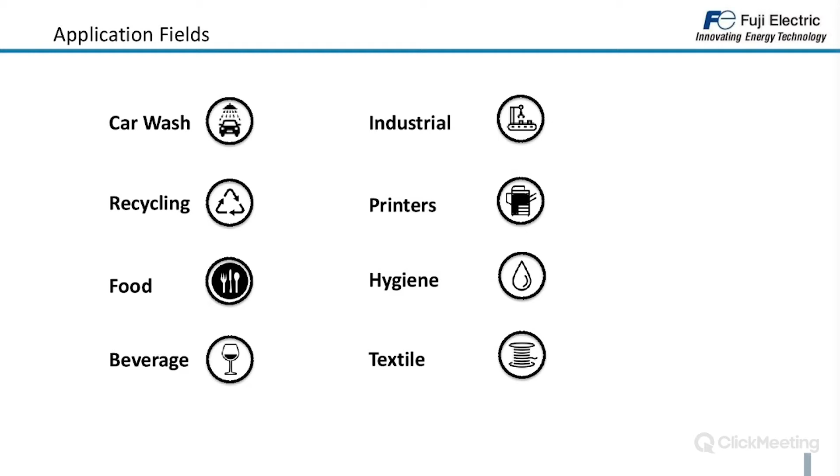So in the United Kingdom, the first one is a petrol station jet washing machine. The inverters used on this are the FRENIC Mini 2.2 kilowatt. We also use the Technoshot HMI on this. The reason they selected the Technoshot HMI is because it's extremely bright.

As you can see, this particular machine is situated outside. We're working with a PLC manufacturer that couldn't actually supply the inverter drives, nor did it have a 7-inch widescreen display. So whilst working with this company, the inverter itself is running a high pressure pump at different levels for different cycles, and the HMI displays the wash cycles and the time.

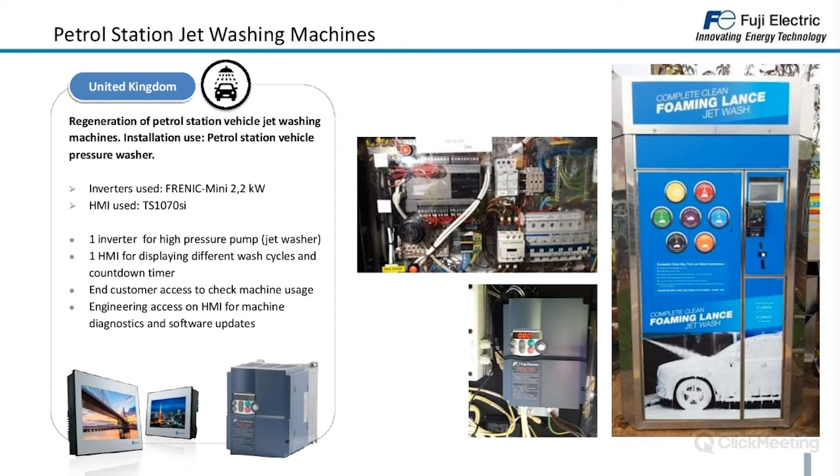It's got a countdown timer to show the user of the machine what cycle it's in. For the end customer, the petrol station customer, the information they could get from the HMI includes filling up the tanks or solution, or doing some general maintenance on the machine. For the actual manufacturer of the machine, there's the ability to access the engineering screens to diagnose and effectively and efficiently mend the machine and put it back into service.

So we're moving to Belgium in the hygiene market, and this is an industrial washing machine. This particular customer has been using Fuji for over 10 years now, using the FRENIC Mega. This application required control of a special motor with power between 7.5 and 45 kilowatts. The frequency needed to run between 1.2 hertz and 150 hertz, but the optimal speed was around 30 hertz.

As you can imagine, you'd need high torque because you've got water and product clothing material inside the washing machine, so it's necessary to have high torque at low speed. With the spin cycle bringing it down from high speed to zero, you'd need braking capabilities. With the FRENIC Mega, you've got outstanding braking capabilities with an integrated braking unit built in, up to 45 kilowatts.

As I mentioned, you need high control of the torque. We achieved this without the encoder, using vector control. And because the application is running in a laundry, the carrier frequency was important, so we needed to increase the carrier frequency to reduce the motor noise. I have to say the technical help from Fuji to get this machine up and running and set all the parameters, we did.

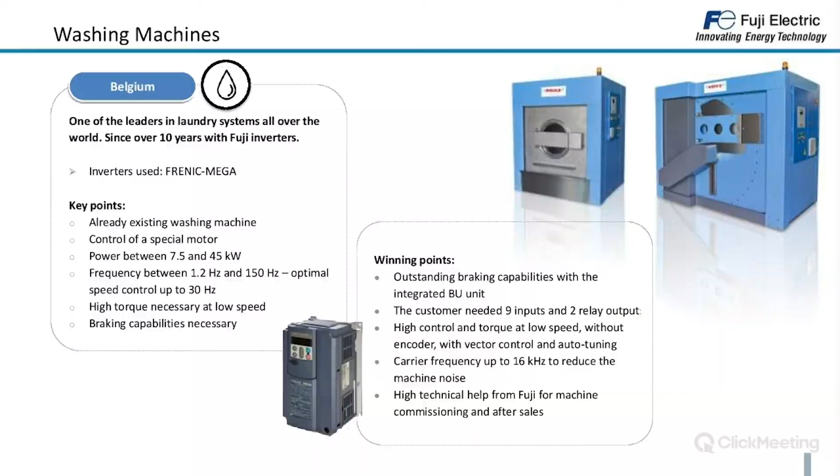So Spain, still in the hygiene industry. This one's a duct cleaning machine. Basically, if you can see, there's a brush on the end. It's like a hose with a wire inside, and the flexible hose is used so that it doesn't cause any damage to the ducting.

The inverter used is a FRENIC Mini C2, and we're using the MONITOUCH Technoshot screen on there. It's fair to point out that this particular customer wanted to differentiate themselves from the competition, bearing in mind that this machine is a global machine, shipped around the world. So they introduced an HMI to the machine and removed all the standard push buttons, etc., from it.

The drive used is, as I said, the FRENIC C2. The reason they used it is because of the quick response torque limiting time, to protect the wire inside the hose and also to protect the ducting. There are talks of a future possible upgrade of the screen because, as I mentioned, it's a global product, and with the V9, you're able to gain remote access to the screen.

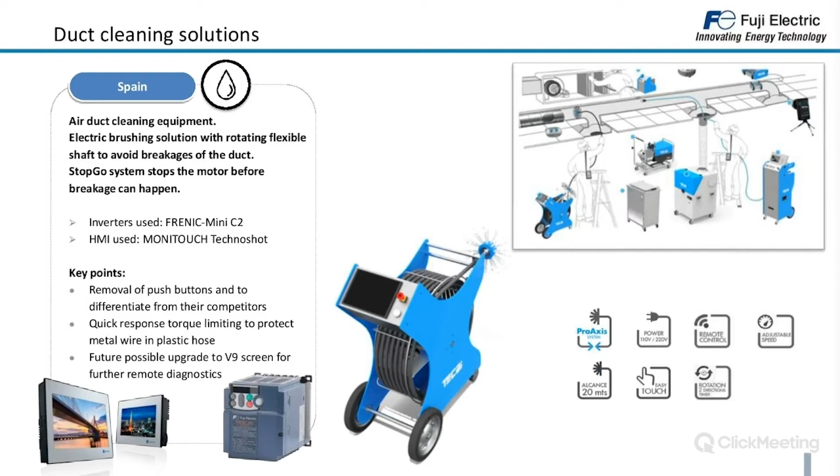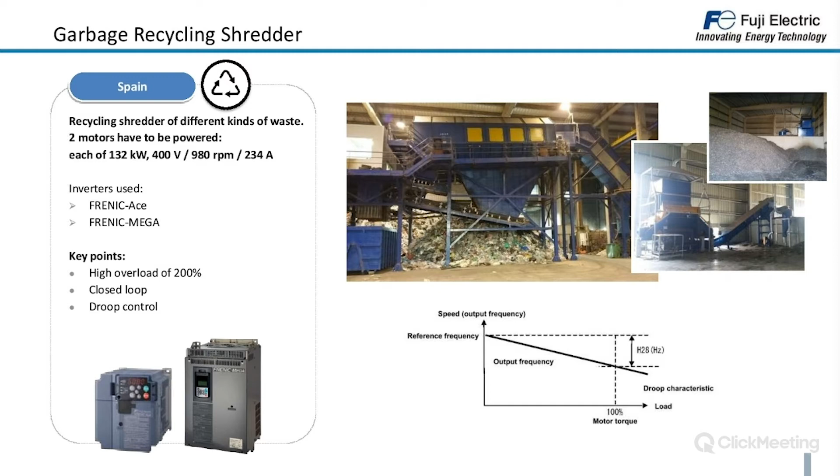So Spain again, this is in the recycling industry. This is a garbage recycling shredder. Basically, this shredder has two motors of 132 kilowatt, and this is using a Mega. The ACE is basically on the conveyor, and the key points here are that we needed high overload of 200%, and with the Mega we can achieve that for 3 seconds. Also closed loop control because we need to keep the speed constant, and droop control so that we can actually load share.

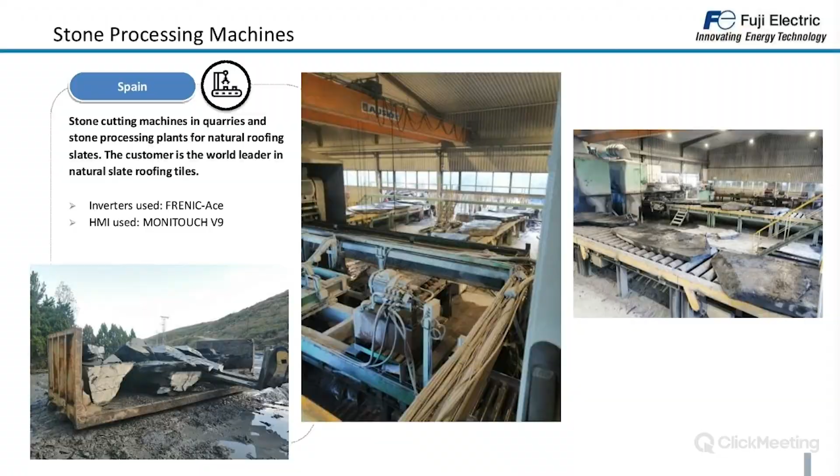Spain again. This is a stone processing machine, but essentially this stone processing machine is an end user. They have some remote machines in the quarry, but essentially they wanted to upgrade the plant, and they've used the FRENIC Ace and the MONITOUCH V9.

One of the reasons, through negotiations and discussions, this was done with one of our partners in conjunction with Fuji. What was important to the customer was the after sales support and maintenance, so we were chosen with the partner based upon the sales and support for this plant. Also, with our inverters, we have a 10-year life cycle. In the plant, we use 256 FRENIC inverters up to 132 kilowatts, and there are 60 V9 HMIs there too.

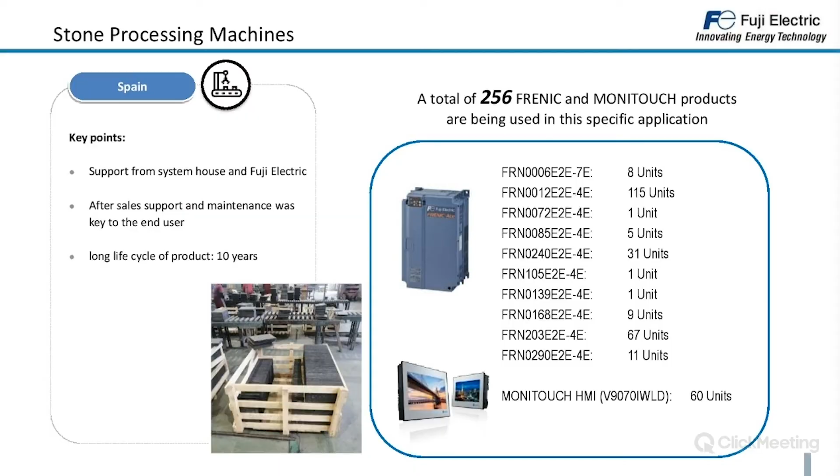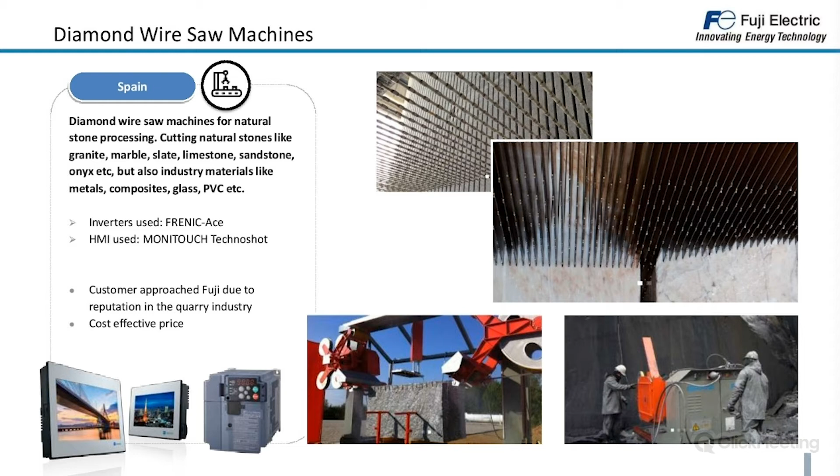Because of the success that we have in the quarry industry, we're still in Spain. This is a diamond wire saw machine, and this particular customer actually approached us during the lockdown of this year in March, and we gave them support over the phone and got them up and running on the HMI. They're now using our HMIs, and we are currently working with them to start using the ACE inverters.

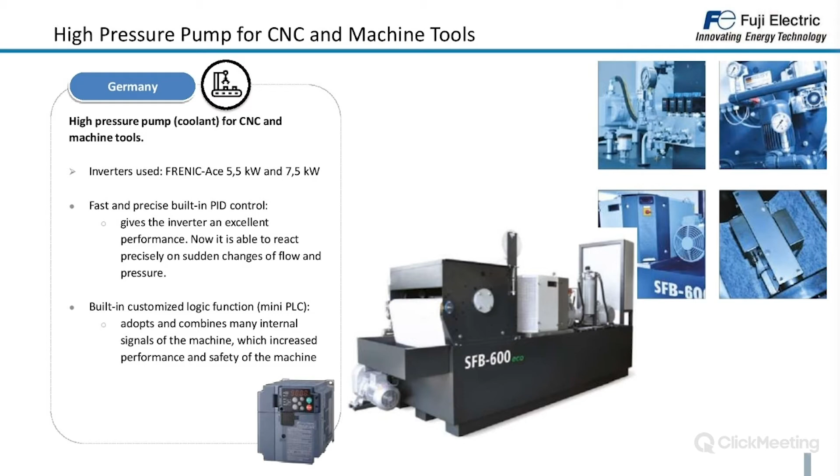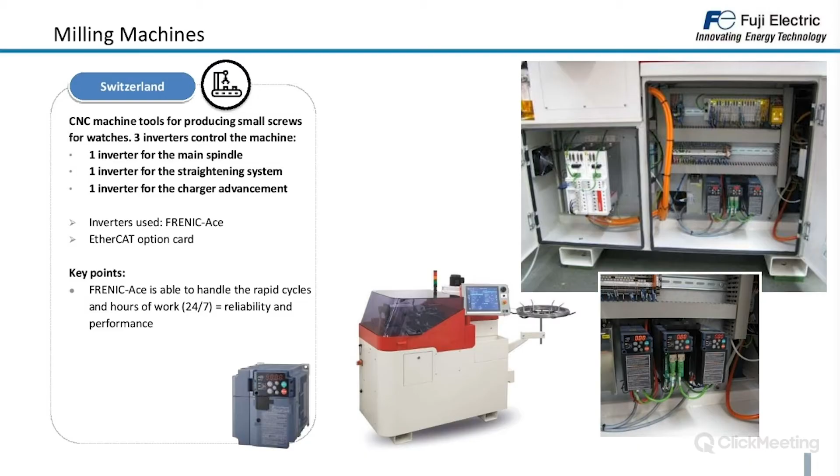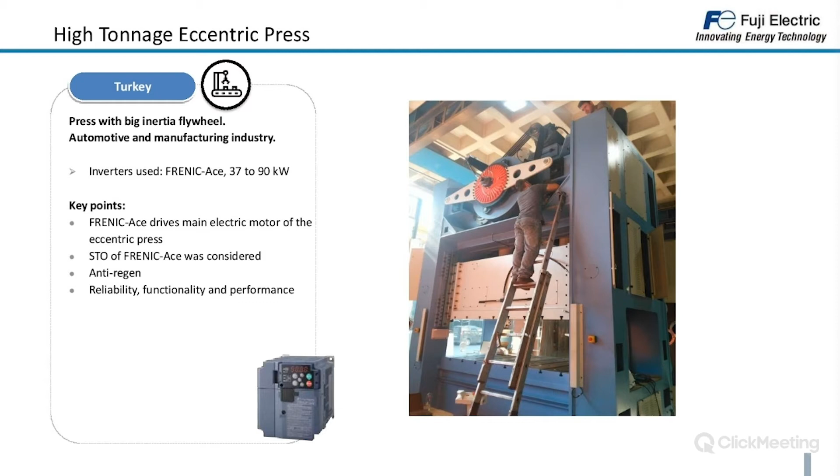Moving to Turkey, this one is a high tonnage eccentric press. The drives used here are 37 to 90 kilowatt drives. The key points for using this inverter: because of the shock loading when using a press, we've got something called anti-regen, and essentially that stops us from overvolting on the drive and tripping the inverter. We've got safe torque off on the drive as well, so that was considered for this particular application, and of course reliability, functionality, and performance.

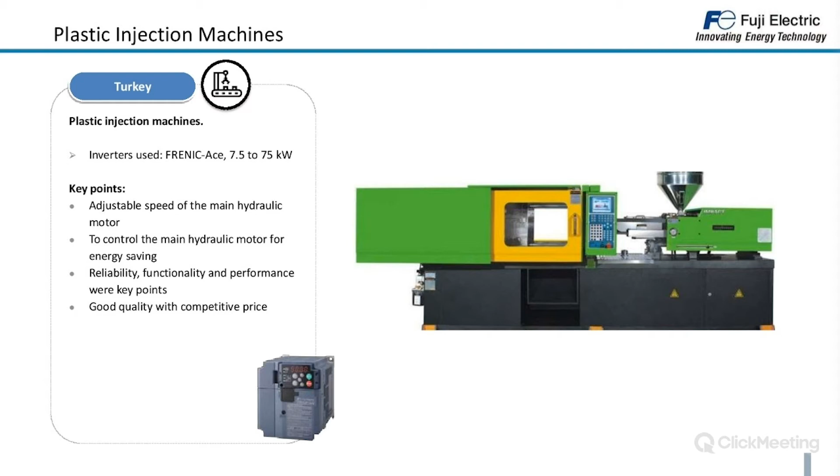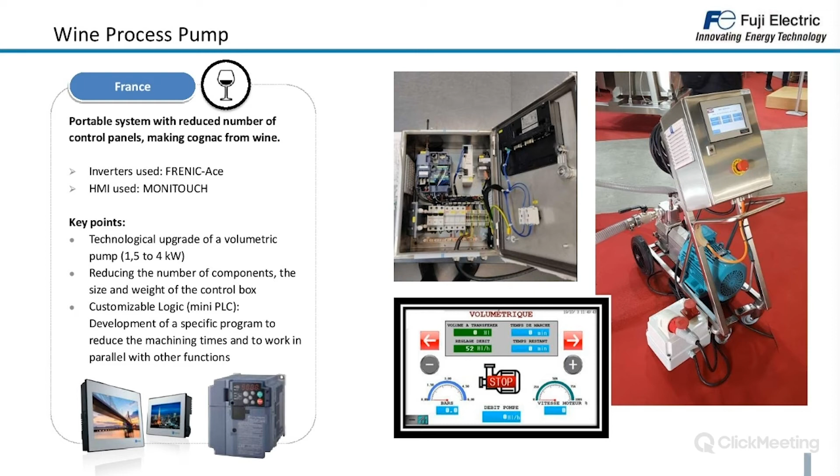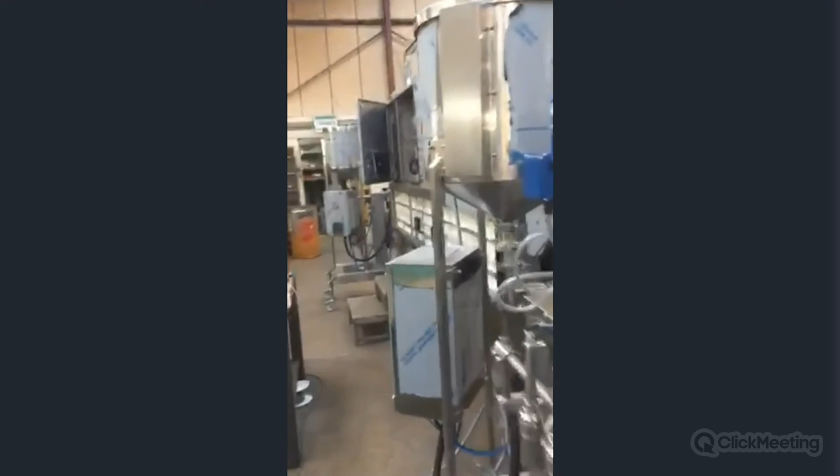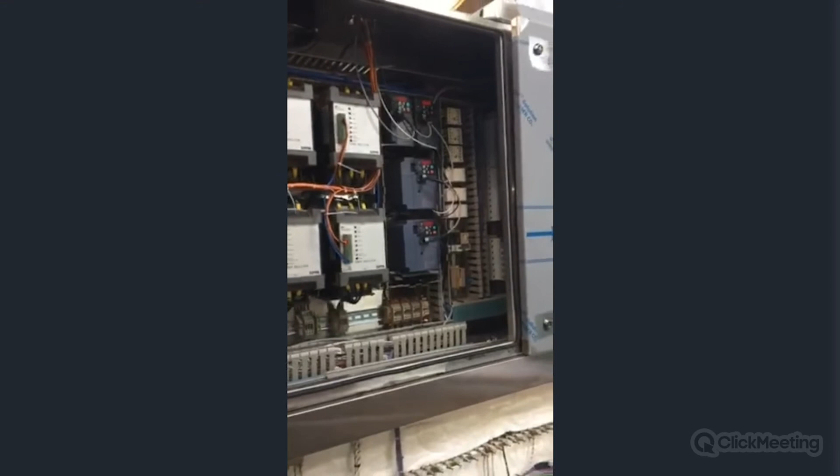As you can see here, this is the fans for the ovens using FRENIC Ace, and then there's the servo controller, which is flipping the omelettes over, and then another oven process here with some more drives, and then the HMI. The whole network actually was running on Modbus only.

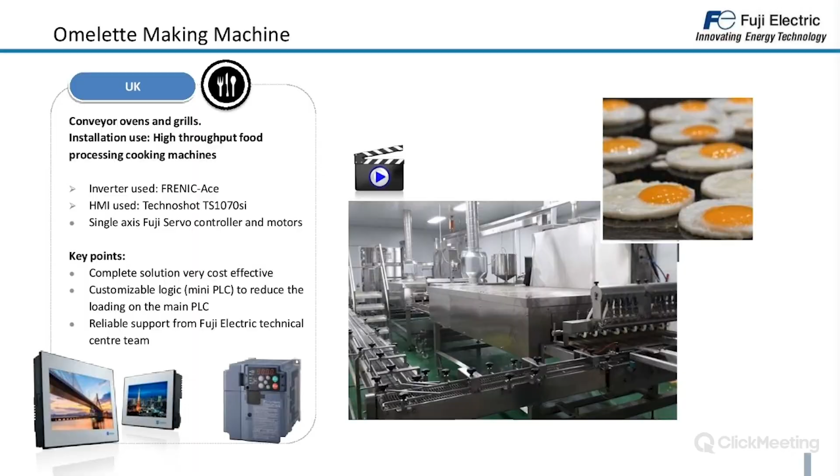Moving to Italy, bread making machines. This is a company called Minipan, and Minipan manufacture industrial scale machines, but also modular machines for the dough, for the molding, etc., before everything goes into the oven.

The inverters used, as you can see, the FRENIC Ace on an EtherCAT network, and also Modbus communication. Each modular machine uses 2, 4, or 6 inverters, while the industrial lines use 24 to 60 inverters. They used FRENIC inverters because of the reliable product, the superior technical performance, and the technical support given to them pre and post sales.

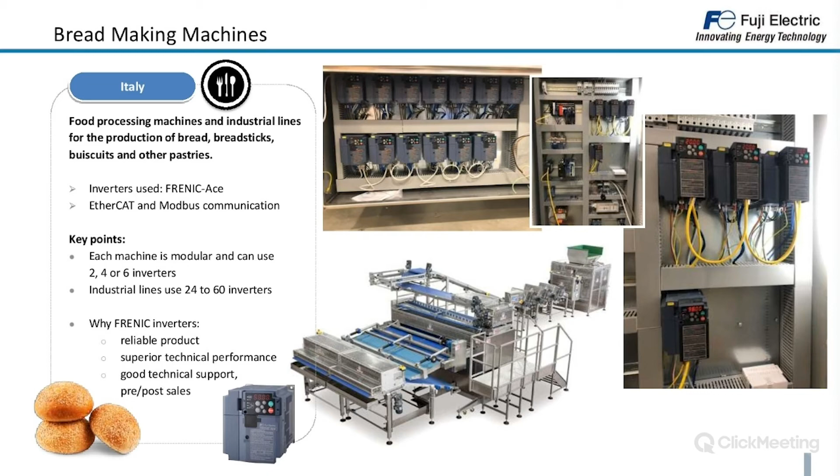Over to Croatia, a candy production plant using 16 conveyors with an HMI. They used the Mini C2 inverter on this one, and a Technoshot 7-inch screen. What they wanted was global control and the ability to switch on different conveying systems on the plant at any one time.

They also used the HMI to do all the data logging. They wanted to monitor the power and performance of each conveyor, and to determine any failure by using predictive maintenance.

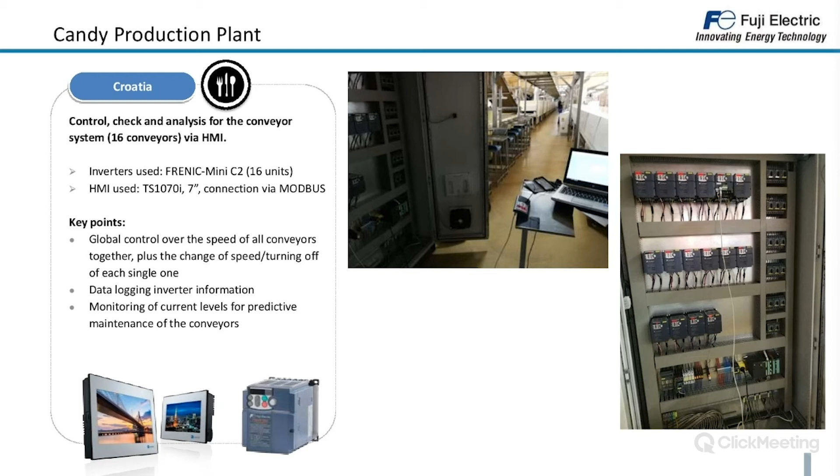This one's interesting - a restaurant in Croatia using the FRENIC Ace and also an HMI. What it's doing is actually rotating the restaurant whilst you're eating, so you get a 360-degree view of the city it's located in.

The reason for doing this was because prior to using inverters, they had failures on the motors. Essentially what they wanted was to be able to control the motors more effectively, and to analyze and get a lot of information fed back on how it's performing.

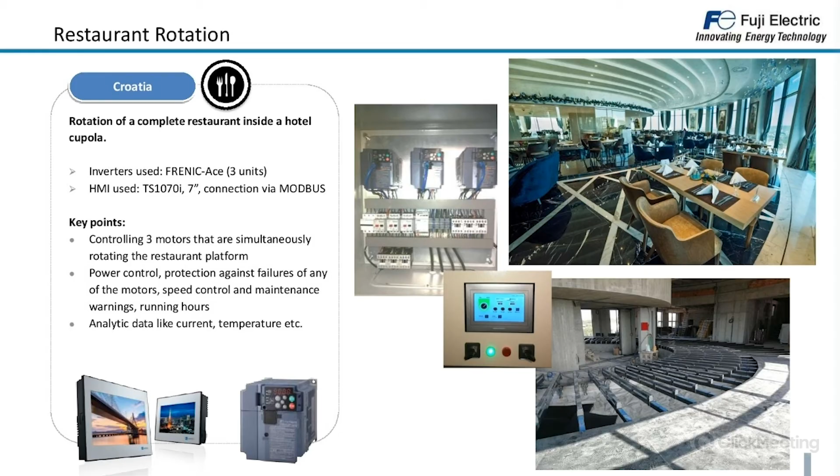Croatia, this is a carton production plant, controlling cartons or pallets as they come down. It's weighing the pallets and looking for gaps so that it can fill that gap with another pallet.

They're using the FRENIC Ace on this, but using the mini PLC again, because they didn't want to use an additional PLC in the system. So they've done all the logic in the drive itself, and achieved it quite effectively.

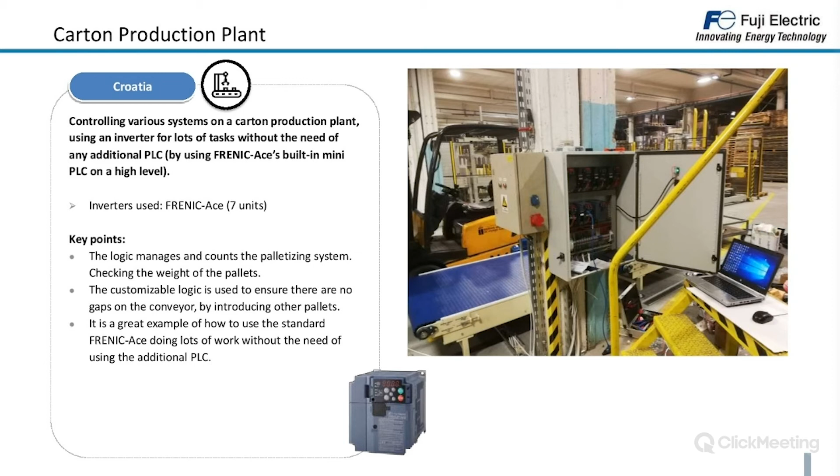Israel - this is a printing machine, and the task was to run the motors, which are permanent magnet motors, from 0 to 15,000 RPM in 3 seconds. We used the FRENIC Ace, and achieved this goal in open loop.

They used CANopen, which is built into the drive. If you look at the picture of the inverter, you can see a black square underneath the display, and if you remove that, you'll see an RJ45 connector.

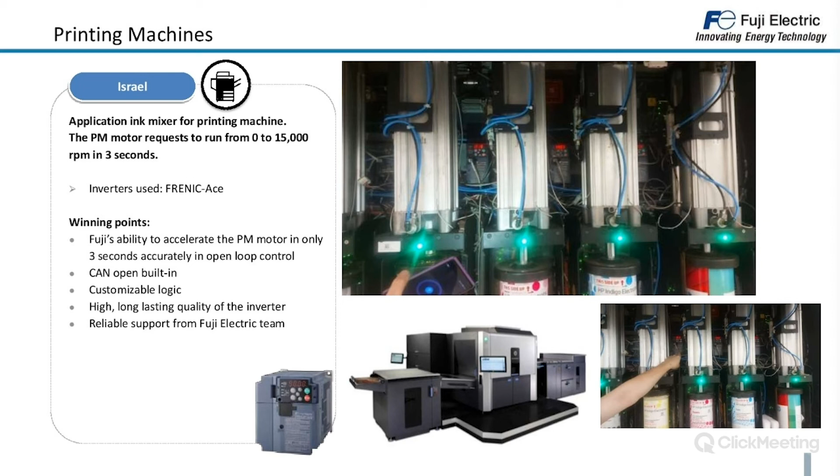Again, they use the mini PLC functionality within the drive to take the loading from the PLC. Some of the other criteria was long-lasting quality of the product, and again the superb support given to the customer.

This one here is roll-to-roll paper. This particular one is controlling 2 axes - it's actually lifting the roll onto the machine, and also either unwinding or winding. The criteria here was high overload, which on the ACE you can achieve 200% for half a second. Again, it was best performance in open loop.

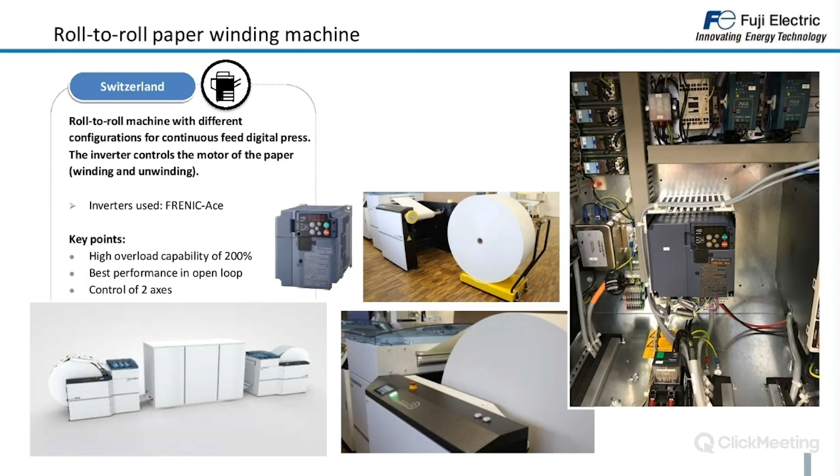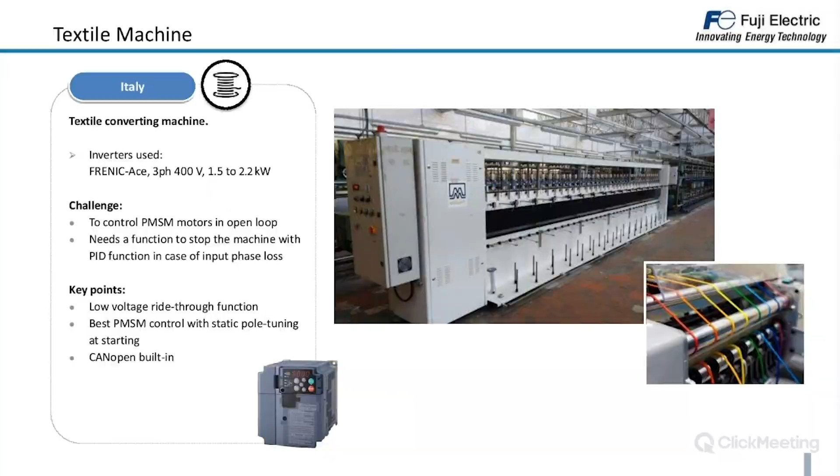Okay, so products. I'm just going to take you through the products as you've seen. With the FRENIC Mini, Ace, and Mega, you've got high performance functionality, as I've gone through. The fact that they're multi-purpose, we can actually put those onto many different types of applications that you've seen. EMC filter is built in. They are easy to use because you've got all the fundamental functions to get you up and running at the beginning with the F parameters, and if you're using a FRENIC Mini, you'll get a similar flavor in terms of the programming on the Mega all the way up. Energy savings can be achieved using our inverters. Different network capabilities available, so we've not only got EtherCAT, but we've got Ethernet IP, Modbus, etc., coupled with a 3-year warranty.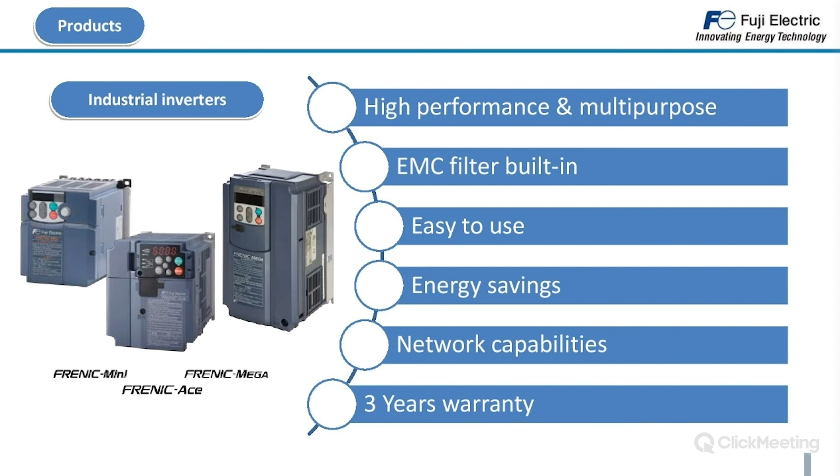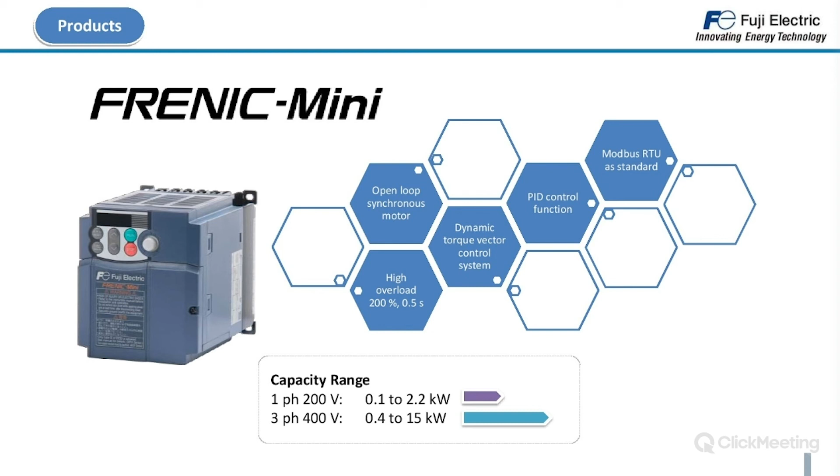The FRENIC Mini, just to give you a couple of highlights. With a FRENIC Mini open loop, you can control an open loop synchronous motor. You've got high overload at 200% for half a second, which is fantastic for an entry level drive. Dynamic torque vector control system built into it. You've got PID functionality, and you've got Modbus RTU as standard. The capacity range is single phase 200 volts from 0.1 of a kilowatt to 2.2 kilowatts, and three phase 400 volts, which is 0.4 of a kilowatt to 15 kilowatts.

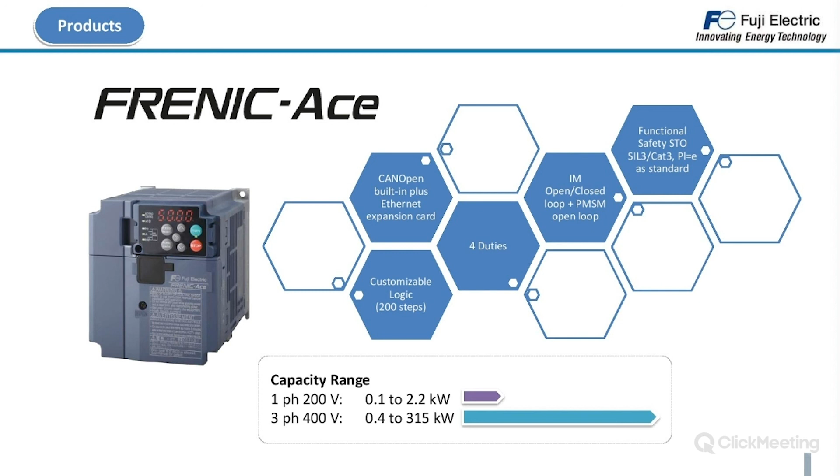Induction motor, open loop, and also closed loop control, and we can control a permanent magnet synchronous motor open loop. We've got as standard the functional safety safe torque off to SIL 3, Cat 3, PLE, and that's standard on all the Ace products. Single phase, your 0.1 of a kilowatt to 2.2 kilowatts, and then 400 volt 3 phase, your 0.4 of a kilowatt, all the way up to 315 kilowatts.

Moving on to the Mega. The Mega, you don't have to have an encoder on it. We can actually have sensorless torque control, which is fantastic. High overload for 3 seconds on this one at 200%. Open loop, closed loop induction motor, plus closed loop permanent magnet synchronous motor. You can plug in up to 3 option cards at any one time on the Mega, and also functional safety safe torque off. Capacity range, 400 volts, 3 phase is 0.4 of a kilowatt, all the way up to 630 kilowatts.